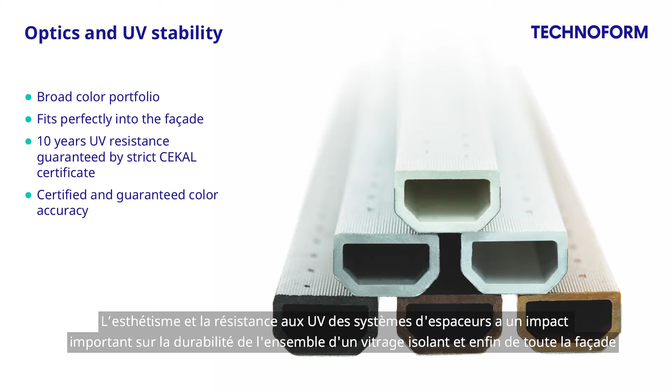This again leads to a lighter weight of the windows, which makes installation and maintenance easier. The optic and UV stability of the spacer systems have big impacts on the durability of a whole insulating glass unit and finally on the whole facade. Blinds are getting smaller, so the visual appearance of the inner view of the IGU is getting even more important. That is why we not only comply with the very strict CEKAL certifications, but additionally test our systems in our own laboratory where we can simulate even harder conditions. As a partner of the Bundesverband Flachglas and Gütegemeinschaft Mehrscheibenisolierglas, we set the standards of tomorrow and bring the quality of the IGU to a next level.

We at Technoform believe that there is no one-fits-all solution. Instead, there must be a flexible adaptation of the system to the application-specific requirements. Different climate zones lead to different requirements on the insulating glass unit. We have the expertise to design the edge bond no matter if it's going to be installed in polar regions like Greenland, with very cold winters, or Saudi Arabia with extremely hot summers.

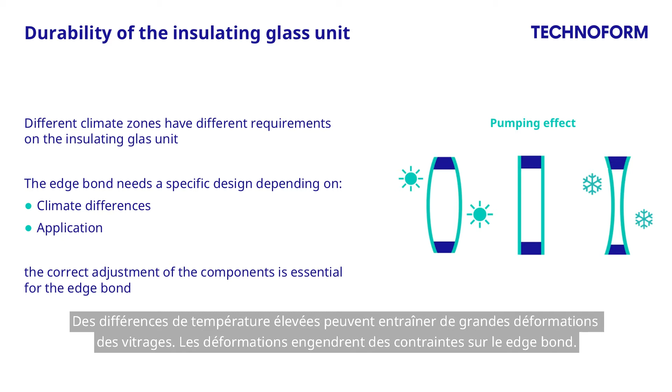High temperature differences can lead to big movements of the glass panes. Movements lead to stress on the edge bond. If the stress is permanently very high, especially the sealant and spacer system is not able to withstand. It then either fails the sealing function of the IGU, resulting in gas leakage and moisture absorption, or even worse, in glass breakage. Again, the perfect symbiosis of all components is essential to ensure optimal product performance.

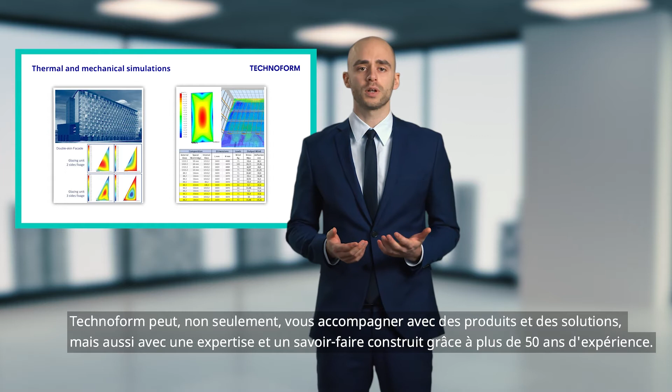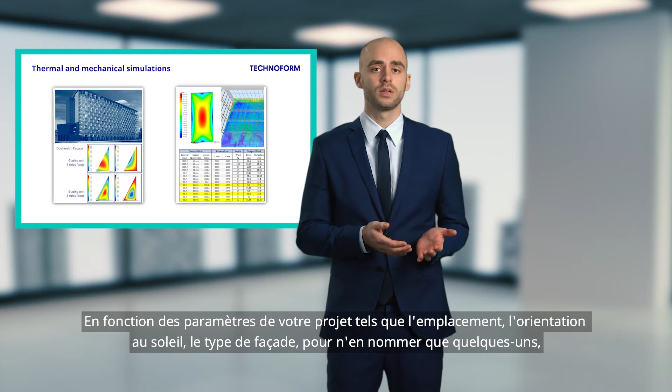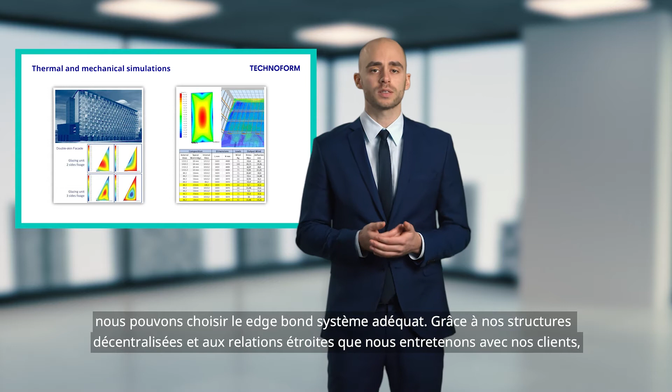Technoform can not only support you with products and solutions, but also with expertise and know-how of more than 50 years of experience. We can provide you, for example, with thermal and mechanical FEM simulations during the planning phase of your project. Depending on your project parameters like location, orientation to the sun, type of facade, just to name a few, we can choose the right edge bond system. Because of our decentralized global structures and personal relation to our customers, you will easily find a partner nearby who will love to support you with your project.

As manufacturers of thermally optimized spacers for insulating glass, we see it as our task and responsibility to help planners, window constructors and manufacturers by sharing our expertise and experience and promoting interdisciplinary collaboration. We give direction to more durable thermally optimized edge bond solutions.

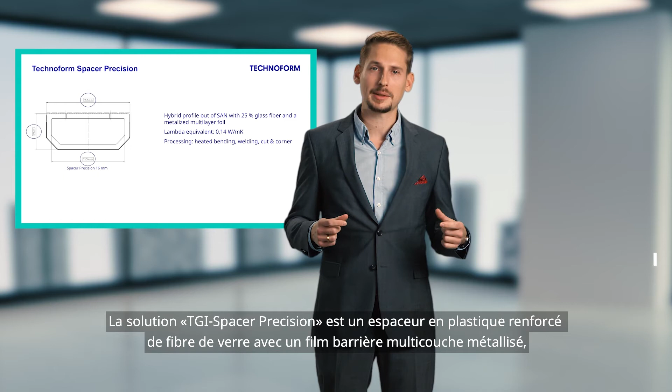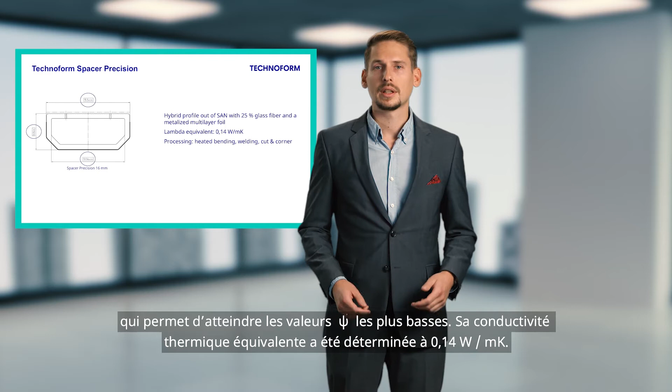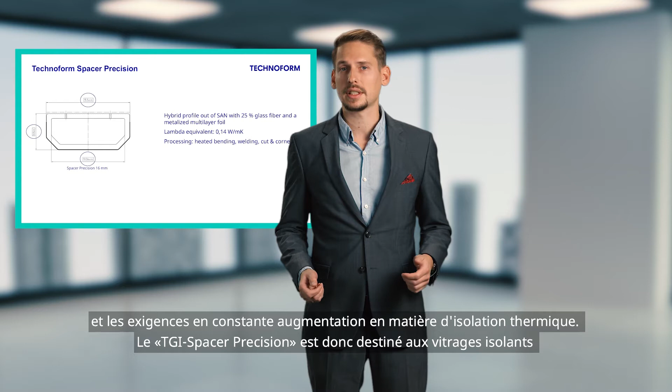Hello, my name is Maximilian Konrad and I'm a product manager at Technoform. The spacer Precision is a glass fiber reinforced plastic spacer with a metallized multilayer barrier film, which in combination enables lowest psi values. The equivalent thermal conductivity was determined to be 0.14 Watt per meter Kelvin. The impetus for the development was given by the trend towards zero energy houses and the constantly increasing requirements for thermal insulation. The spacer Precision is therefore intended for glazing with the highest demands on thermal performance.

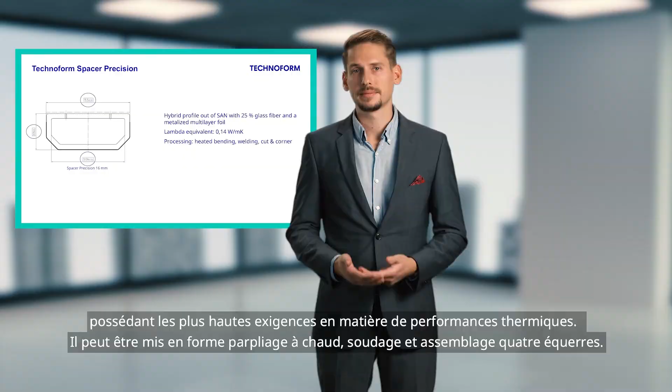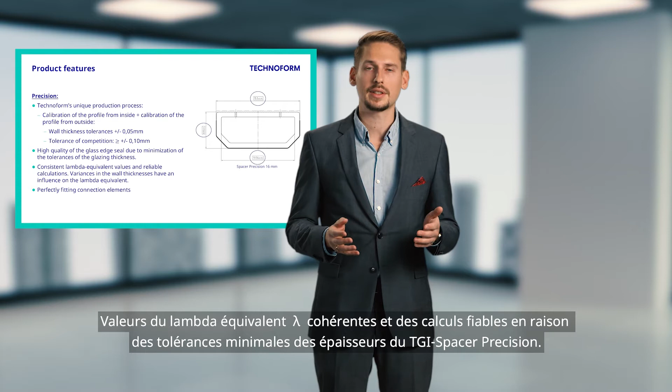It can be processed by means of warm bending, welding and cut and corner. Technoform's unique production process enables us to keep tolerances within the range of plus-minus 5 hundredths. In comparison to other market participants, this is half what they are able to produce. Customers benefit from a high quality of the glass edge bond thanks to minimization of the tolerances of the glazing thickness, constant lambda equivalent values and reliable calculations due to minimum tolerances in the wall thicknesses, and perfectly fitting connecting elements for a stable frame connection.

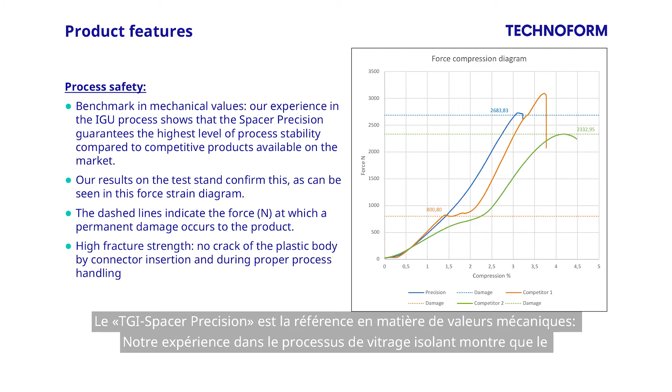The spacer Precision is benchmark in mechanical values. Our experience in the IGU process shows that the spacer Precision guarantees the highest level of process stability compared to competitive products available on the market. As you can see in this force strain diagram, our test results confirm this. The dashed lines indicate the force in Newton at which a permanent damage occurs to the product. The high fracture strength prevents a cracking of the plastic body during connector insertion and during proper process handling.

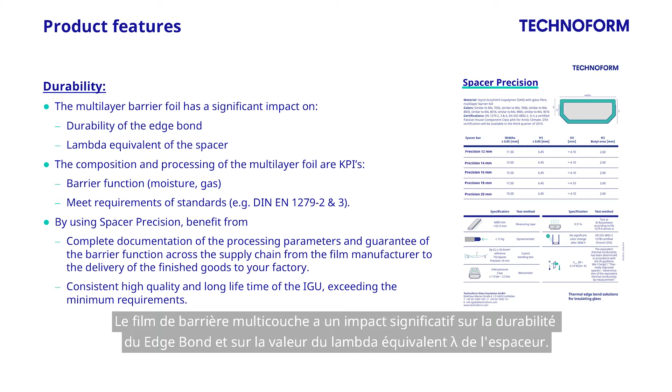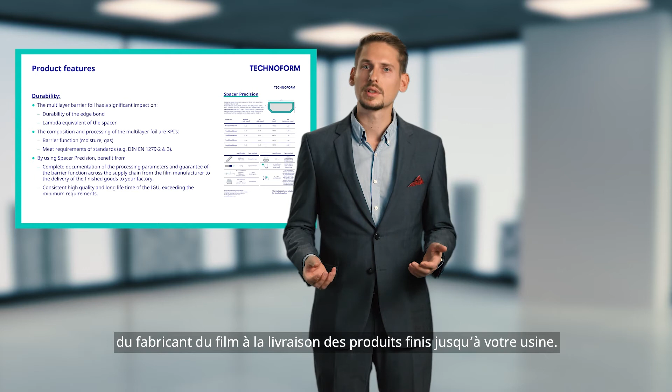The multi-layer barrier foil has a significant impact on the durability of the edge bond and the lambda equivalent of the spacer. The composition and processing of the multi-layer foil are KPIs for the barrier function against moisture and gas and to meet the requirements of standards like DIN EN 1279 Part 2 and 3. By using Precision, you can benefit from a complete documentation of the processing parameters and the guarantee of the barrier function across the supply chain from the film manufacturer to the delivery of the finished goods to your factory, as well as a consistent high quality and long lifetime of the IGU exceeding the minimum requirements.

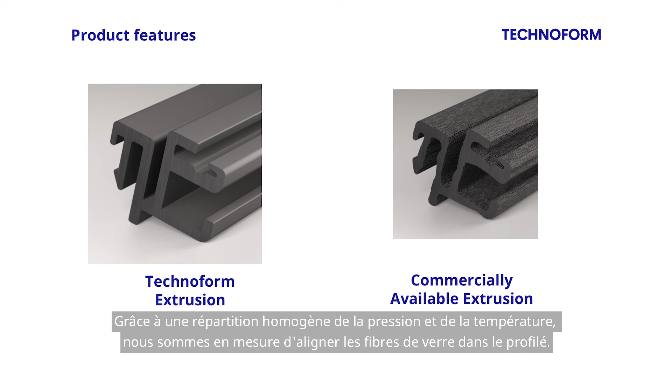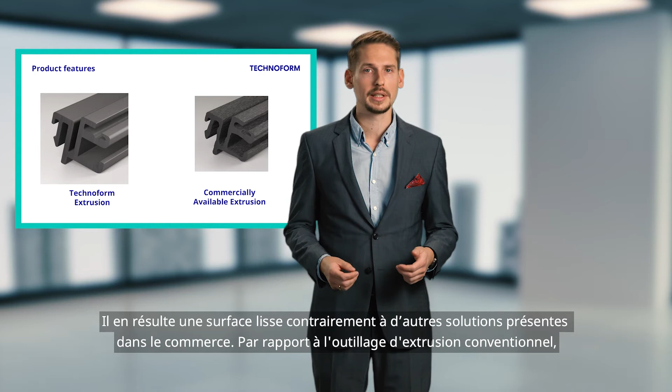Due to homogeneous pressure and temperature distribution, we are able to align the glass fibers in the profile. This results in a smooth surface in comparison to commercially available extrusion. Compared to conventional extrusion tooling, Technoform's tooling technology avoids an optical weld line and thus prevents negative influences on the aesthetics and mechanical properties. The smooth and shiny surface of the Precision ensures a high-quality appearance of the insulating glass and meets the highest demands on aesthetics. The high-quality surface enables good adhesion of conventional ink and offers very good readability of the printed markings for complete traceability of your products.

The spacer Precision also contributes to the work safety of your employees. The well-embedded glass fibers prevent skin irritation when employees come into contact with the profile with their bare skin. In addition, the spacer Precision ensures safe handling in the serial production thanks to its high break resistance and prevents accidents at work.

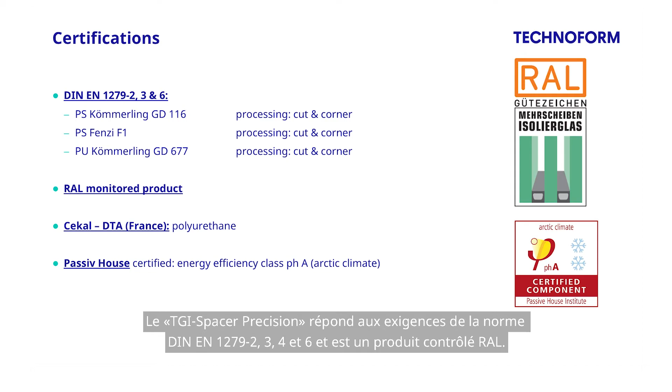The spacer Precision is fulfilling the requirements of DIN EN 1279 Part 2, 3, 4 and 6 and is a RAL monitored product. Furthermore, it's a Cekal certified product and classified passive house component rated with energy efficiency class phA. The spacer Precision is available in 5 sizes and 6 colors. Further widths will be introduced into the market in 2021. Matching corner keys with and without butyl sealing as well as straight connectors are available.

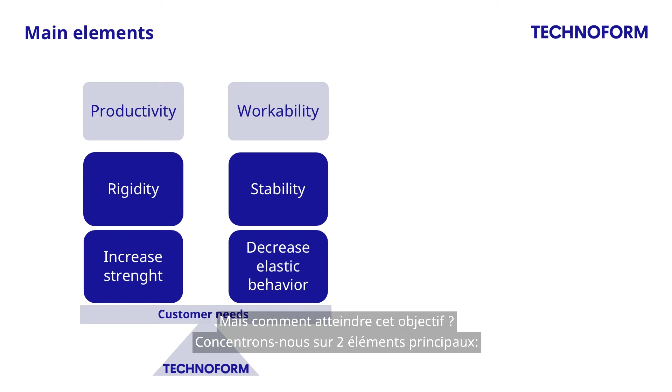To answer this question, we focused on one of our main customer needs, improving productivity and workability during the production process. But how do we reach this goal? Let's focus on 2 main elements: the productivity, which depends on the rigidity of the spacers, and the workability, which depends on the stability of the spacers. To increase the rigidity of our spacer, we had to make them even more resistant. To increase the stability, we had to decrease their elastic behaviors.

Our studies focus on a patented technology that belongs to Technoform, the reinforcement wire. By optimizing these components, we are able to combine both mechanical properties, rigidity and stability. We succeeded to demonstrate that using wires with a larger diameter and a specific grade of steel could improve up to 20% the rigidity and the stability of the spacer. As a result of this analysis, we developed a spacer with this kind of wire. In June 2020, our new solution obtained the CE marking and the Cekal warranty.

The following months, we have worked to quantify the impact of the introduction of this spacer on the production process of insulating glazing. We know that the utilization and deposition of the frame are critical for our customers. Efficiency and quality of those steps depend on the straightness of the frame sides, the quality of its angle, and its resistance to twisting effects. Increasing rigidity has brought accuracy in the bending angle. It has also halved the deformation induced by the suspension of the frames. Those improvements allow to reach a great homogeneity of the butyl bead.

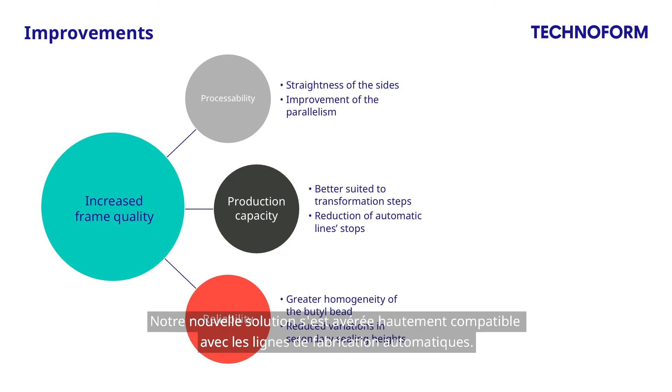Our new solution proved to be highly compatible with automatic manufacturing lines. Frames are less deformed by the stress occurring during the production steps. There is hence less interruption of the manufacturing lines. To conclude, this Technoform solution stands out by greater quality and reliability and by increasing the production capacity of insulating glazing.

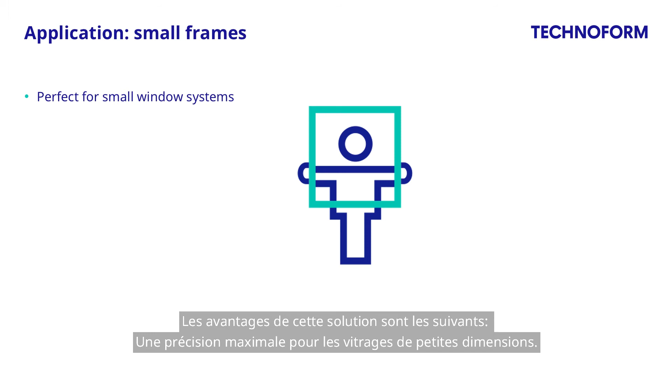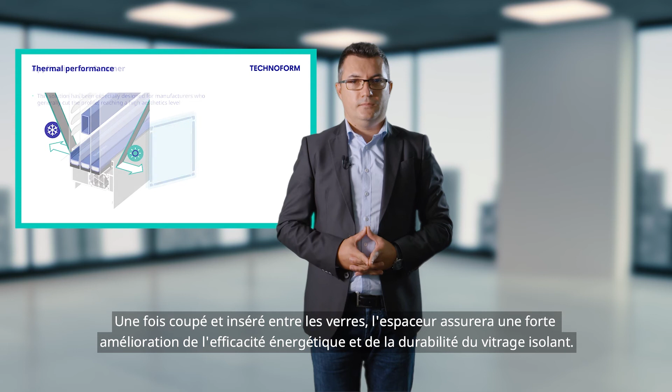The advantages of these solutions are highest accuracy for smaller glass pane sizes, a seamless integration in existing processes and cutting systems. Once cut and inserted between the panes, the spacer will ensure a strong improvement in IGU energy efficiency and durability. Moreover, it is flexible enough to be used in curved insulating glass. Technoform quality is certified DIN EN 1279-2/3/4, PF datasheet, Passive House. To sum up, this Technoform solution allows our customers to reach a new level in energy efficiency and to get more competitive in their markets.

My name is Fabiola Renzi. I'm product manager for the Italian market. A fast-paced industry landscape demands new ideas and solutions every day. Technoform, as your reliable partner, is aware of it. We are always oriented to develop new solutions for our customers.

In today's market, there are new challenges to face due to a strong competition and a strict timing in project realization. We identified that production speed and stock management optimizations are getting more and more important. This is the reason why we have developed the perfect solution to make our customers more competitive on their markets.

Thanks to our long-term experience, we are able to design and manufacture pre-cut kits and pre-assembled frames of spacers and mounting bars, according to any kind of project, even the most complex ones. Our tailor-made frames have the following advantages. They increase the efficiency and productivity of our customers' production process. Technoform will calculate dimensions of the frames and will provide pre-assembled frames or pre-cut kits in a very short time.

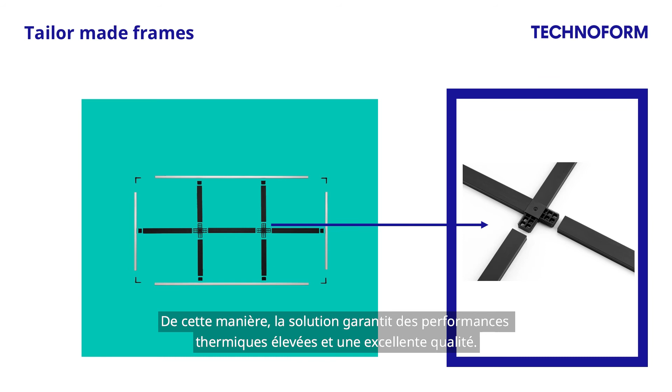Our frames are composed by Technoform spacers and mountings. The mounting is placed inside the insulating glass, providing a complete thermally optimized system. In this way, the solution guarantees a high thermal performance and an excellent quality. We truly believe that a strong partnership with our customers makes the difference. Here we are for you.

My name is Mauro Lardini, Development Manager for Italian market. Thanks to our expertise, we at Technoform created the Edge Bond Calculator, a complete technical support aimed to assist our partners and customers, including engineers during the tendering phase, till IGU processors during the construction phase, as we noticed that customers need to evaluate the performance of insulating glass before starting a project.

Following the process to design a building, in the tool there are 4 areas to analyze: thermal, mechanical, acoustic and dynamic, which are friendly to use. The tool will automatically create a customized technical datasheet in each area. Let's start from the thermal tool that includes 3 different calculations: the Ug for double and triple glass unit and the Uw for the complete window system. In this section, the calculator provides the thermal value with the different structure, system and slope.

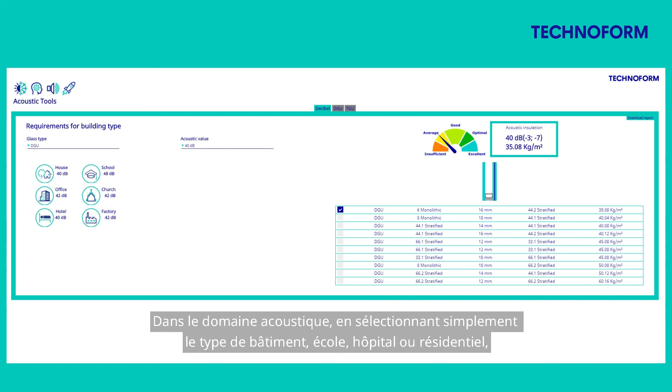The mechanical section provides suggestions in terms of minimal requirement of thickness, according to the stress, the dimension of IGU and type of the building. The report shows stress and deformations. This section includes calculation relevant to linear lateral load, wind and snow pressure. In the acoustic area, just selecting the building type, school, hospital, residential, the software will provide 10 possible configurations based on estimated value both for double and triple glazing unit.

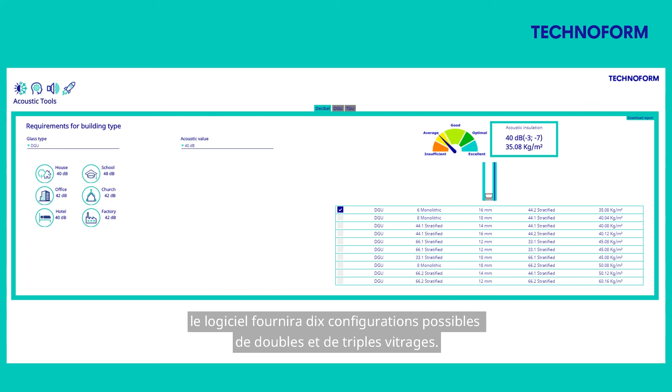Finally, the dynamic section, now in progress, will issue a thermomechanical stress and airflow analysis to suggest the best solution for any project, considering the building site and its exposition, to analyze the solar radiation and the energy effects on IGU, and all system components such as sealant, shading elements, and glass properties. The dynamic report will support designers to understand any possible risk of breakage from energy absorption. In conclusion, Technoform with the Edge Bond Calculator will be the best partner during all steps of any project.

The additional benefit of our customers is our priority. To achieve this goal, we are implementing our online store. Each customer will have an overview of its tailored data with price lists, payment, and delivery conditions. In addition to that, there will be an overview of all orders, including the status and the access to our whole product catalog. Our customers will have the possibility to upload their orders into our online store. They can place orders 24 hours a day, 7 days a week.

We are currently introducing Kanban. It is a method of production process control developed by Toyota Production System. The procedure is based exclusively on the actual usage of the materials at place of supply and consumption. It enables the reduction of local inventories of pre-products in and near production. The aim of the Kanban method is to control the value-added chain at each manufacturing or production stage of a multi-stage integration chain at optimal costs. Technoform includes the system into the ordering and delivery processes.

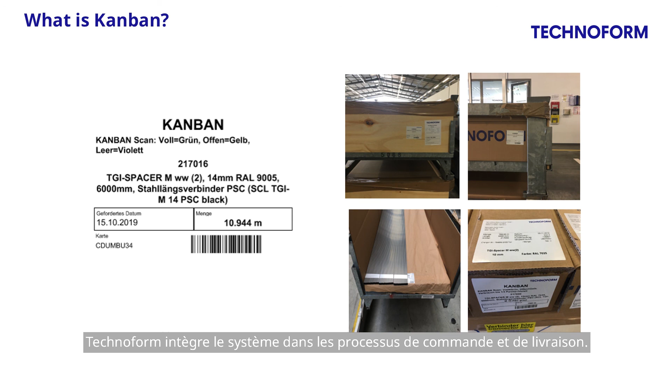The customer benefits from the reduction of capital lockup costs by lowering inventory levels. Furthermore, the material is available at any time. That saves the customers from having to plan their orders in advance. The system frequently loads a digital inventory control. There will be a reduction of workload through the digital overview and statistics given. The delivery will be free and there will be no volume contract requirements.